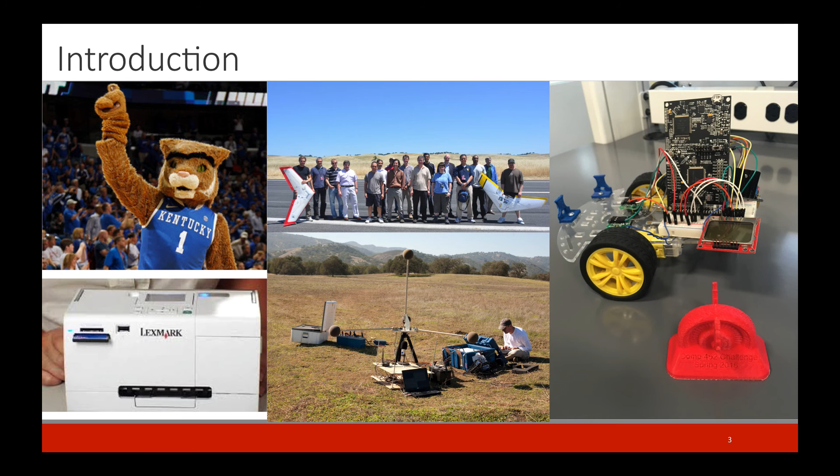All right, that was a little bit of a long-winded story, but I want to give you a little bit of context about quadrotor history. So I don't know if you've seen any of this kind of stuff in this class, but quadrotors date back to the early 1900s. So 1907 was credited with the first flight of a quadrotor type device. And then in 1920, this was the first flight distance record for helicopters of 360 meters. So they made it 360 meters in 1920.

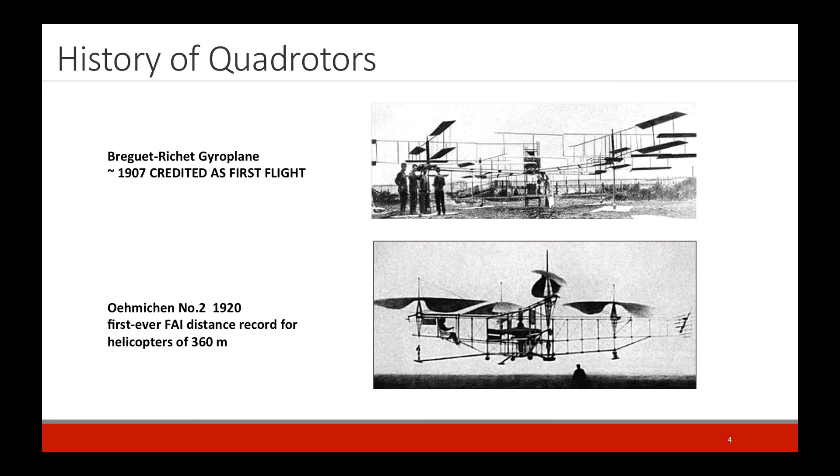And notice there are people flying on these things, you know. There's all this talk out there now about drone taxis and drone helicopter cars and stuff like that. And it seems crazy, but there were guys sitting on these things all the way back in the early 1900s. And then things got a little more improved a little bit later. This was a device that flew 5 meters off the ground.

And then by the 1950s, we had something known as the VZ7. And one of the terms for this is called the flying Jeep. So it could go 60 meters high and a speed of 30 miles per hour. I can't remember the name of the company who produced this, but it's an Army flying Jeep. So again, there's a pilot in there. Seems like a pretty dangerous spot to be for me, but you know, someone had to do it, I guess.

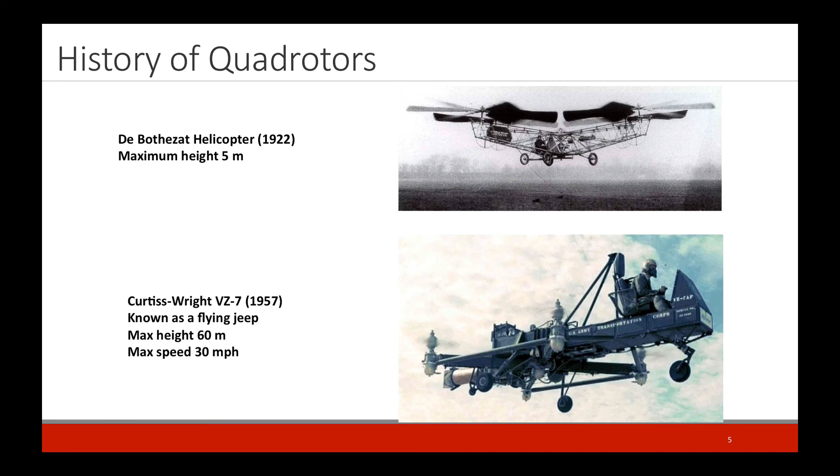As I referred to earlier, what's in a name? So you hear the word drone, what do you think of? Is that a positive context or is that a negative context? And this may be even one of the survey questions you hear. For me, it's very negative because when I think of drones, I think of blowing up people in Yemen, in a country we're not at war with, or blowing up people, possibly even American citizens, in countries that we're not at war with. I'm not okay with that, but it's what the term drone says to me.

But the definition, if you look it up in the dictionary, is a stingless male bee, one that lives on the labors of others, or a parasite. And then the third is an unmanned aircraft or ship guided by remote control or onboard computers. And I found this interesting because I also had in my...

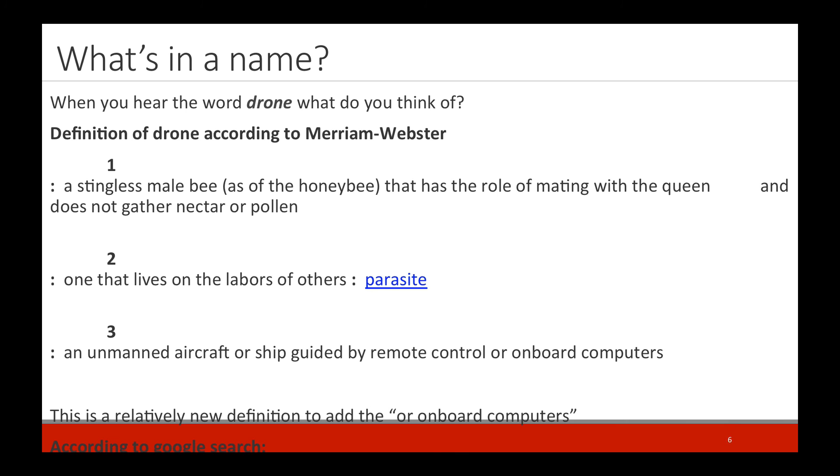Sorry, I got pushed down, I guess. Yeah, so this one didn't quite... well, that's okay. No, I think it's just a formatting thing. So let's see. You can try if you want. Yeah.

So I found that interesting that they included onboard computers. So another thing about drones for me, I consider them to be remotely piloted, mainly because I'm in the business of doing the onboard computer automatic piloting. And so then this definition made it even more mixed up for me, because how do I separate the work that I'm doing, where I'm trying to write algorithms to automatically fly these things, from the folks who are going out to Fry's and buying one on Christmas Eve and flying it, or Best Buy.

Or Best Buy, whatever. Someone from Best Buy in here? Maybe. All right, cool.

So how do I separate the work that I'm doing from that when I'm talking to people who aren't in the business? And so this is a relatively new thing about the onboard computers. According to Google, it's a remote-controlled pilotless aircraft or missile. And so that was more in line with my thinking before.

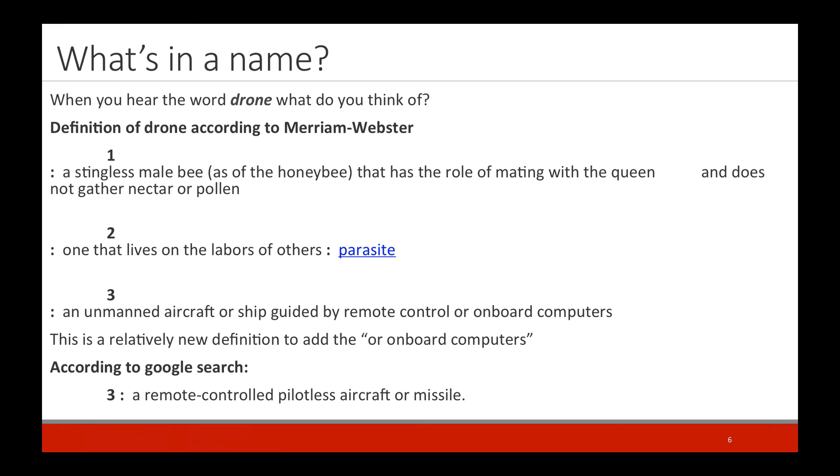So what I really want to talk to you about today is how do these things work? Some of you probably know a little bit about this, so it's maybe repetitive, but I'll just go through it a little bit. So here's just a cartoon of a... They haven't heard this yet. They haven't? No. Not at all.

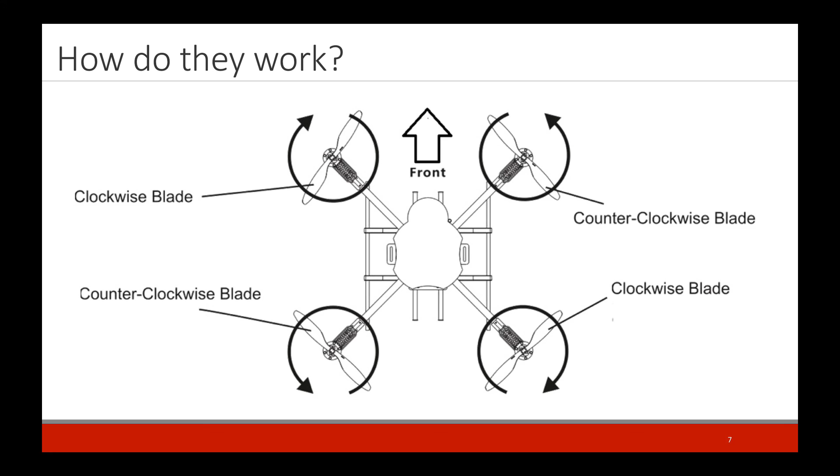Okay, good. So here's a cartoon of a quadrotor, and the way that they work is that the propellers on opposite corners fly together, and then propellers on the same side fly opposite. So these two fly clockwise, and then this one in the bottom left flies counterclockwise. Okay? And we'll go through what that allows us to do because we're having these opposing forces, if you will. But first let me skip back to that. So we'll stick with this theme right now.

So when we have these two flying one direction, these two flying another direction, if all of them are flying the same speed, then we get something called lift. So this is applying a force in the up direction, and the thing will take off, and it'll go up until you come to some sort of steady state speed where the speed of the propellers applies a force that exactly opposes gravity. Okay? So let me go back to this though, and then we'll get into how you change the other things. All right?

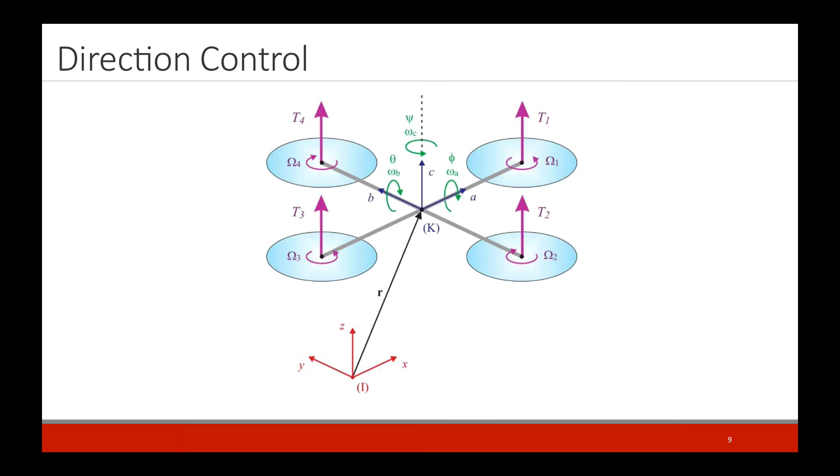Okay, so now what can we do with these two instruments? So some of these equations didn't come through, but that's fine. So instead of a quadrotor, we'll just use this helicopter here as an example.

So when I was saying it can measure the angular rotation speed about these different directions, what I was really referring to is the directions of roll, pitch, and yaw. So if you think about a helicopter, if it's oriented like this, maybe I can

use this thing. Ooh, look at that. Some props. Look at that.

Props laying around. Nice. So if you're thinking about this, pointing out the nose of the airplane being the x-axis, then roll is this direction. So the rotation about the nose of the airplane is roll. Okay? Now rotation about the wing is pitch. So if I'm pitching the nose up or pitching the nose down.

Okay? And then the final thing here is yaw, which is rotation about the center in this plane. So this is the yaw component. All right?

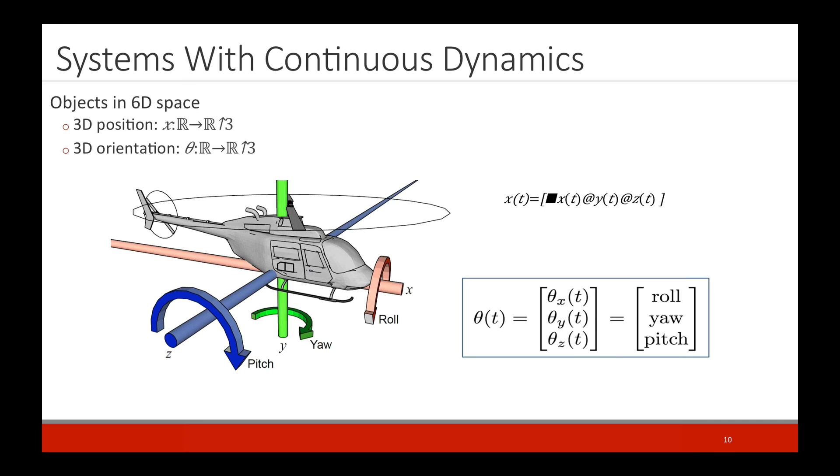And so these kinds of systems, this is going to be a little bit of math, so I apologize. Don't worry about it. You're not going to be tested on it. Just ignore this. Don't apologize. So, that's cool. So these kinds of systems obey Newton's second law.

So how many people have had physics where you learned about F equals ma? Come on, don't lie. No one? Oh, liars. One person? You don't have to take physics here at all? They do, yes, just not yet. Okay, so anyway, this will be a crash course in F equals ma.

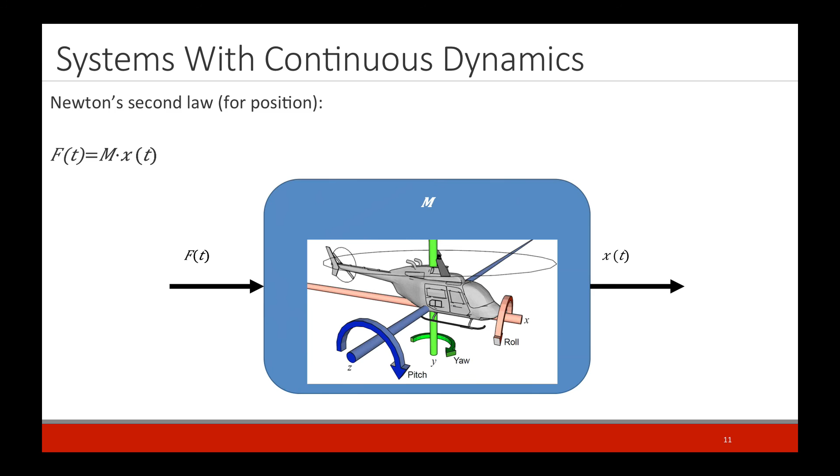So we have F equals ma. So you apply some force. This is some mass. And then that results in some change in the x direction here. Okay? So are the equations screwed up? Yeah. Well, maybe I can just explain this. Don't worry about it. I'll just explain it.

So, if we have this original formula here, which is x equals 1 over m times the force, these x's are the positions. So does anyone know if I have position, how do I get the velocity? What's the velocity mean if I know position? Speed over ground. Speed over ground, yes, but if you just had a generic position, how would you calculate the velocity? What does the velocity mean?

It's in meters per second. So what that means is it's the change in position with respect to time, how quickly my position is changing with respect to time. And so if you want velocity, you take the derivative of the position, okay? And well, don't worry about this. I wasn't even going to go through this anyway.

So then, if you take another derivative, what is that? Does anyone remember that from physics? Acceleration. Acceleration. So the acceleration is just the second derivative of position. Okay? So if I have something that measures position and I want the acceleration, I take the derivative twice. Well, what did I say that this thing measures? Does it measure position or acceleration or velocity?

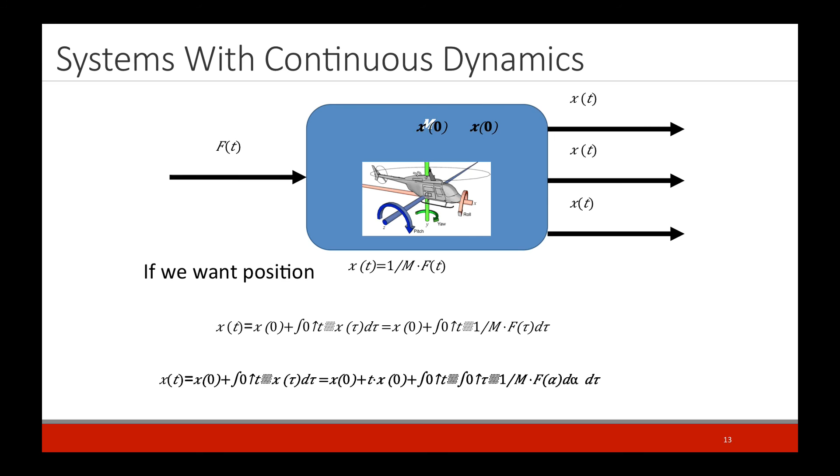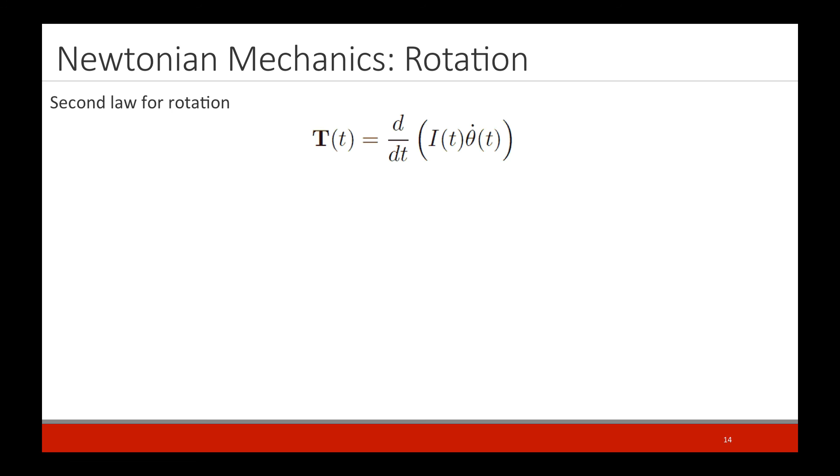Okay, so there's a similar concept for this double integration for angular stuff as well. So we were just talking about the linear position, the linear velocity, the linear acceleration. So there's a similar thing for rotation, but it has to do with torque. So instead of force, the notion of force in the angular world is torque. So this is putting a twist on something.

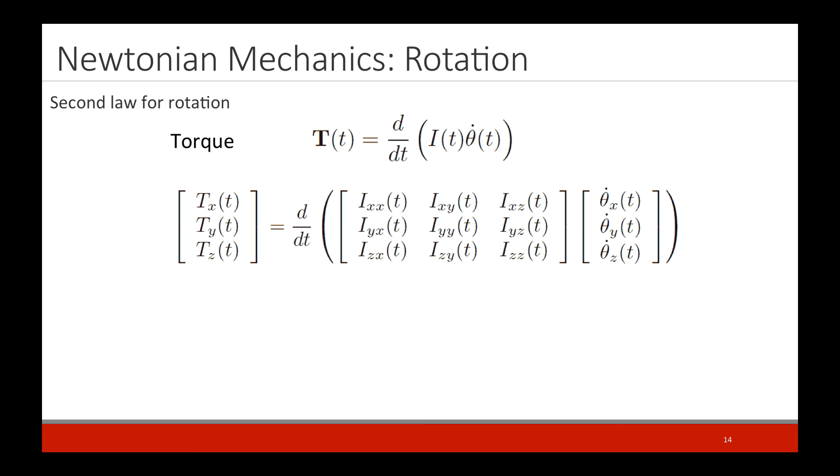So when you slam a door by pushing it, you're applying a force. But when you open a door by twisting the doorknob, you're actually applying a torque. So when you twist something, that's applying a torque. Okay? So don't worry about any of these kind of things. But basically the takeaway here is that to get this angular acceleration, there's a formula: the torque equals I times the angular acceleration. And then this is the formula to get angular velocity.

But we already know that we can measure angular velocity, right? This thing can measure angular velocities. It's not measuring angular accelerations. So we actually get to start with this equation, and then we only have to do it once. So I asked the question here, what's the angular position? It's really just integrating this thing one more time. So this is the measurement that we're getting from the IMU. We integrate it, and we'll get the angular position. So this is how you get the roll, pitch, yaw.

Okay? Now, as a result, the gyro is a somewhat better instrument to use than an accelerometer. Why? Keep in mind, we only have to integrate one time versus two, right? So the noise on the gyro only gets amplified that one time, where the noise on the accelerometer gets amplified two times. And so typically gyroscopes are a little more trustworthy in terms of what they're giving you than accelerometers.

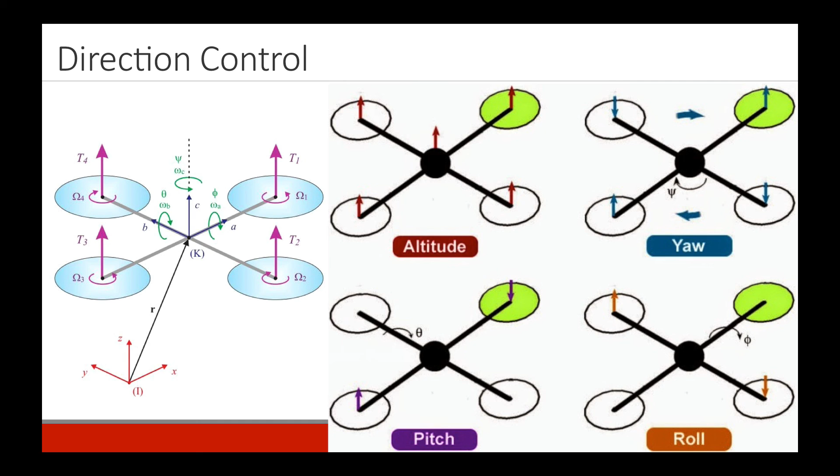Okay, so now it gets down to what I like. So the set point, so we're going to talk about closed loop control, but I'm not going to do any of the math. So if you want to learn about the math of this, take my embedded systems class or come work with me in the summer or independent study or something like that.

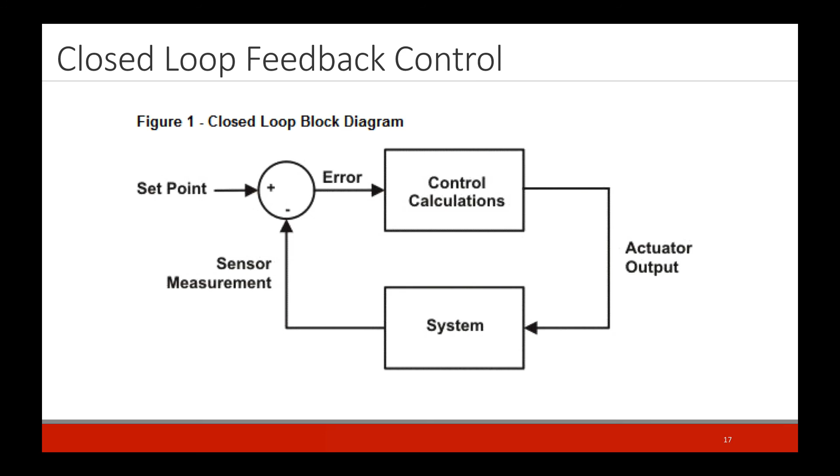So I'll talk just briefly about some of the things that I'm working on and I have some students working on now. So one thing that I've started looking at once I came to CI is the use of UAVs for precision agriculture. And so this is a sensor called MicaSense RedEdge, and it has 5 cameras on it, and it can measure red, green, blue, near infrared, and red edge.

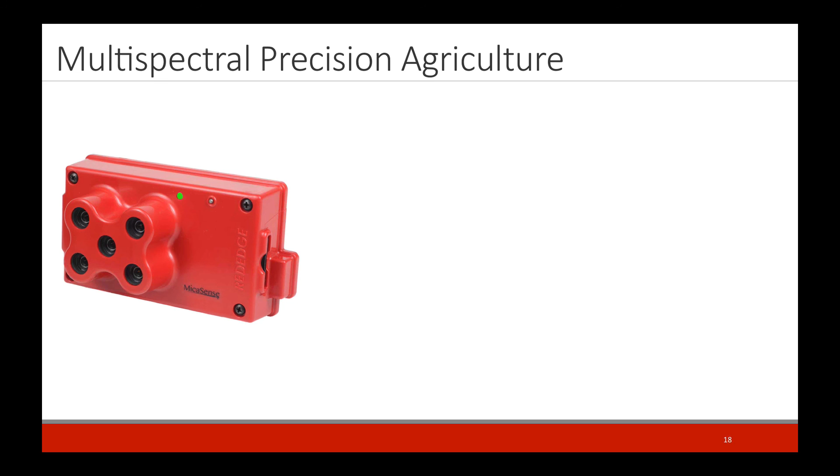Hold on just a second.

It's been studied for a long time using satellite images. So people have been taking satellite images of crops for a long time and processing them over many hours, and then producing reports about the health of various crops. But there's problems with that, in that if it's a cloudy day when the satellite actually passes over, then the data is not as good. There's big delays between actually taking the data and actually getting the report.

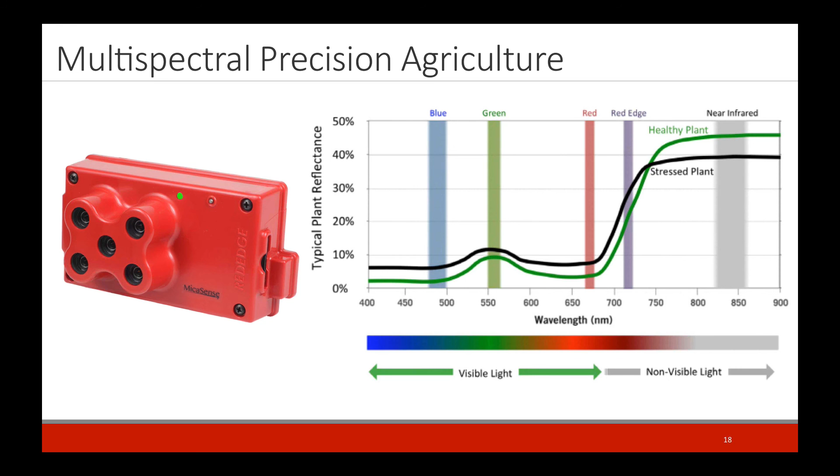Yes? Do you think that in the relatively short distance future we'll be able to tell if there's certain weeds within an area of crop, that we need to go extract an invasive species that's starting to pop up, or is that kind of what you're talking about? Well, that's sort of what I'm talking about from the zooming in standpoint, right? This is in the context of healthy plant versus sick plant, but it could very well be that the colors don't represent healthy versus sick, but just two different types of plants.

But it may be that you have a small outbreak of this invasive species here. Can you detect that and zoom in and actually get more detailed data than just the basic flyover satellite imagery kind of thing? So yeah, I think it could be possible. It's just not where I feel like the industry is right now, and not where the industry's really going. The industry seems to be going in the direction of still remotely piloting and then quickly generating reports.

And unfortunately for all the business of UAVs, it seems that there's not a lot of money anymore in making hardware, but the money is actually in access to the data that they're capturing. And so lots of the companies are focusing purely on capturing the data and generating the reports, but not necessarily doing as much innovative stuff to look for ways beyond just flying the basic pattern above everything.

So I'll just say real quick, that's the purpose of our drone data race, right? To try to interject some more thought, and it's not just about piloting and collecting it, it's also about thinking about what you're doing with that data and how you're going to provide data in a more effective way. But people are totally interested in that exact question.

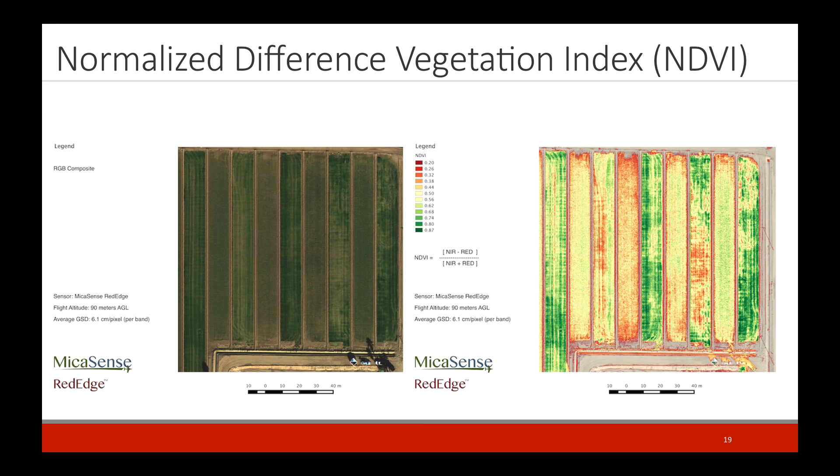One other thing, Sean mentioned this briefly. This is very much related to what I did as a grad student, but now for a much cooler reason than for the Army. Originally, I talked about how we had microphones and UAVs flying around, and they could figure out where the explosion was based on hearing the explosion.

Well, I was contacted by a guy who studies primates in Tanzania, who found my thesis somehow, and I never dreamed anyone would ever find my thesis. He said, hey, I want to do the same thing but with chimpanzees. I want to build a sensor network of acoustic sensors, put them in treetops, and when chimpanzees are calling to one another, they're very loud and you can hear it echoing throughout the valley. So I want to use UAVs to localize and acoustically monitor chimpanzees.

No, he's a guy protecting them. He's not a poacher. So negative, Greg.

The interesting thing about this place where these chimps live: have you guys ever hiked in the Santa Monica Mountain area, like up where Sean lives? You have all these hills and valleys, right? That's sort of how the area in Tanzania looks. The only difference is down in those valleys is pretty dense forest, and as you get up on the hillsides, there are very limited trees.

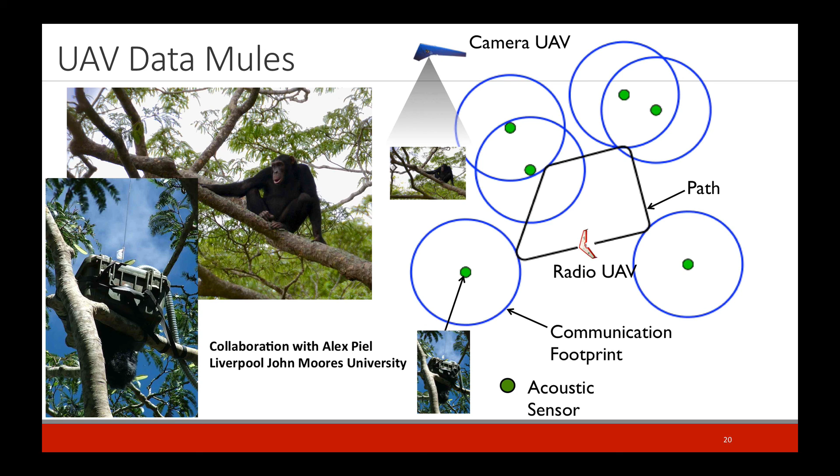I obviously sound like a chimp, so I'm always willing to. You could come out and be. You could be the callback, yeah.

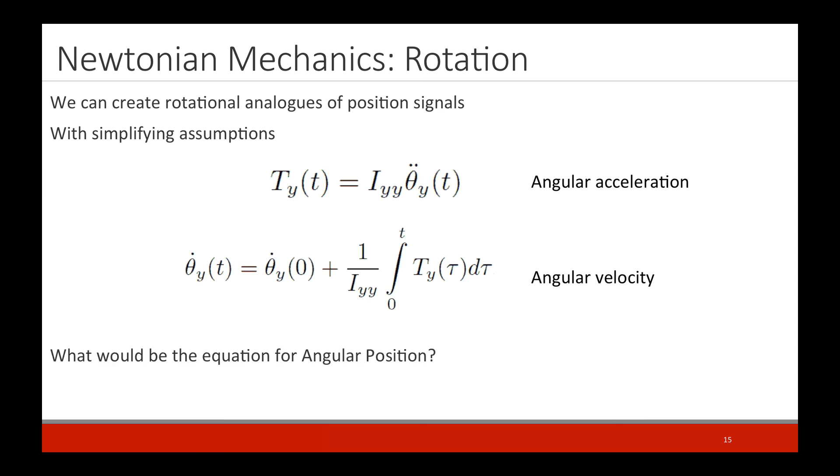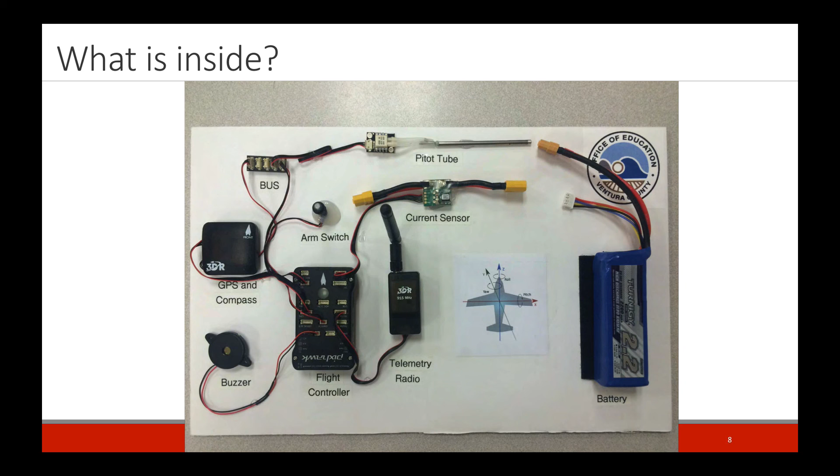This stuff. So they basically bought a 3D Robotics kit of autopilot parts for a couple hundred dollars and replaced the thousands of dollars worth of equipment that was in that UAV. So that was kind of an interesting project. They finally have it where it could be flown now, and I don't think anyone's really ready to fly it yet because it's pretty big. Anyone in here feel like they've learned enough that they're ready to pilot one of these? Daniel's starting to work on the fixed wing, so who knows? Oh, okay, good. So I'm looking for someone who's brave and wanting to pilot this thing later on. It's a beast.

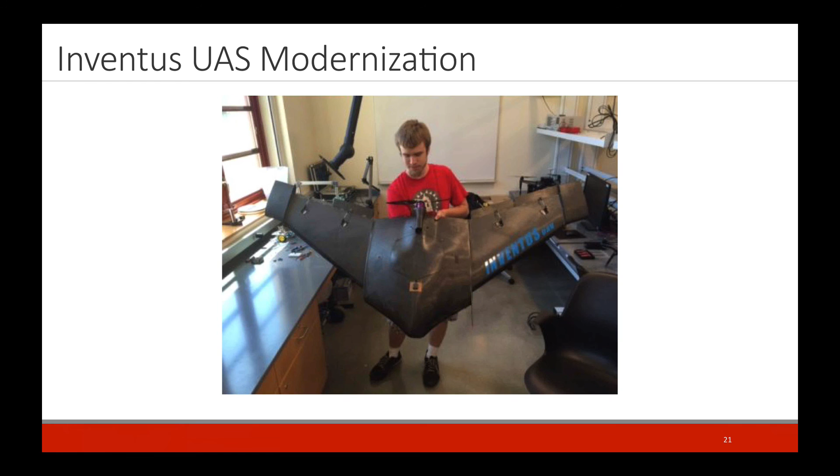How heavy is that? It's not that heavy, actually. It's made of carbon fiber. I mean, it's a few pounds. It's heavier than these foam things, but it's not too much of an anchor. You can come down and check it out sometime if you want to look at it. We have two. We were given two. Really neat though. It's really neat. Oh yeah. Well, you can come check it out.